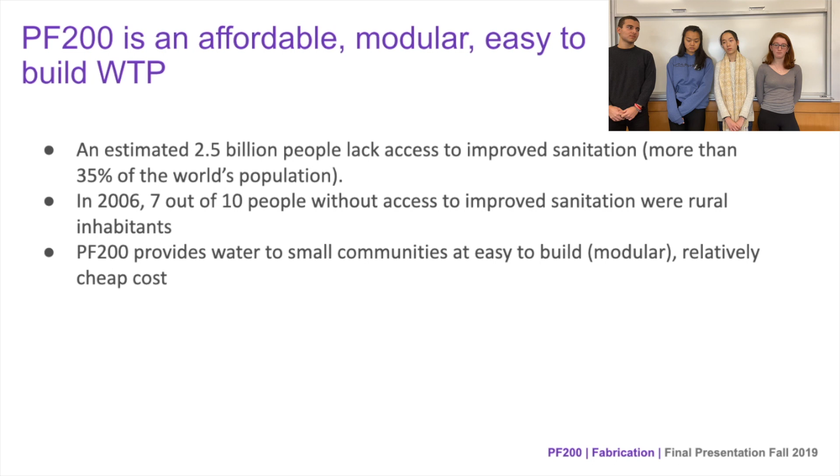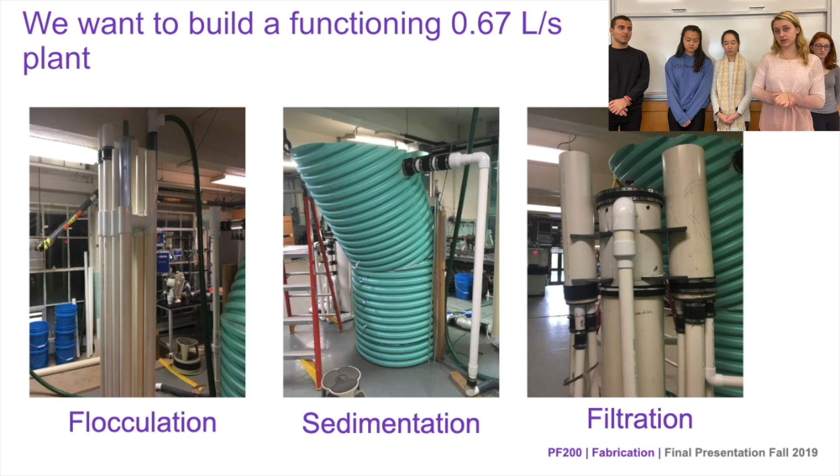With the success of a PF200, a small but impactful dent could be made in helping spread access to clean water. So the work of our team this semester has been mostly finding the problems with the past iteration of this plant, and there are currently problems with the flocculation system, the sedimentation tank, and the filter. And we will talk more about what we are doing to address these problems shortly.

So the past designs of the flocculator involved using a long pipe that was contracted at certain points to achieve the necessary head loss for flocculation. But then in spring 2017, a possible new design was suggested where they would use PVC semicircles that would be threaded through a rod, and that would act like a traditional baffle.

However, there were still some issues with the flocculator. Many of them involved the high cost of PVC fittings and the short residence times. Because of the short residence times, plant operators would have less time to react to certain events in the flocculator, such as dirty water reaching the sed tank.

And based on these criteria, the PF300, which is now known as PF200, was in need of some improvement in the flexibility of the design. In particular, they would need to design a more efficient design for portable plants of different sizes.

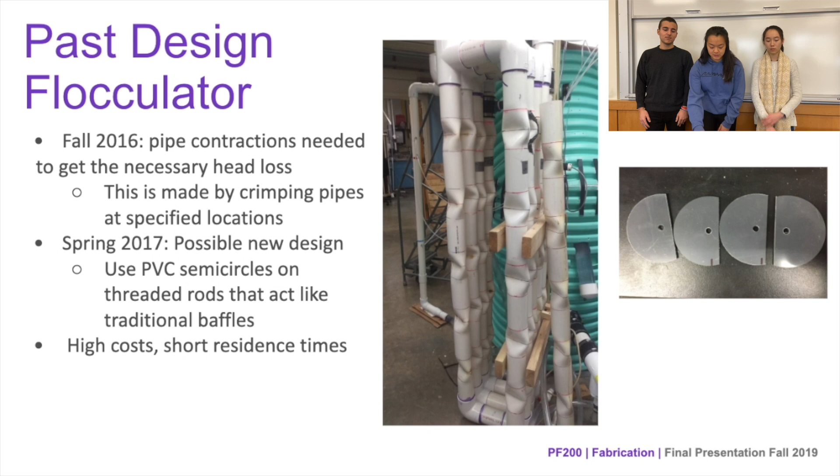As of now, we're mainly focusing on redesigning the filter. So the majority of the redesign in the flocculator is designated for future work. However, we know there are still several constraints that we have to take into consideration. Primarily, one of them is that it has to fit a large tube similar to the conventional flocculator with more traditional baffles. And we took a design from the CEE 4520 project of the flocculatorita. And with this design, we need to figure out how to keep the baffles in place.

We're considering using threaded metal rods and stringing them through each baffle, or using some sort of system with slots. However, this will also depend on what material we are choosing for the baffles. And beyond the baffles, we will still have to decide what height the flocculator is to get the desired head loss and the number of collisions that are needed for flocculation to occur.

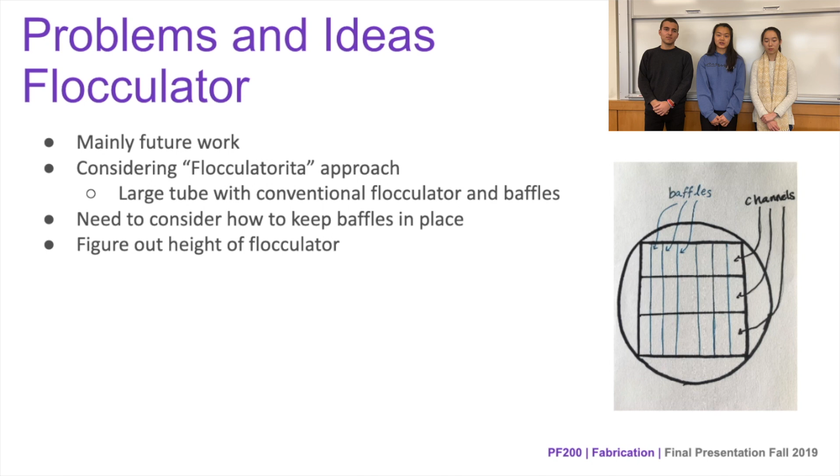So the previous design of the sedimentation tank was a large pipe that was cut and then welded back together at an angle to support the sedimentation plates that allow the floc to settle on. And the sedimentation plates themselves were literally plates of metal slanted at an angle. And some previous versions in Honduras were actually plastic roofing tiles for this function. And there was a single jet reverser at the bottom of the tank to prevent floc from accumulating at the bottom. And finally, there was a floc hopper to remove floc.

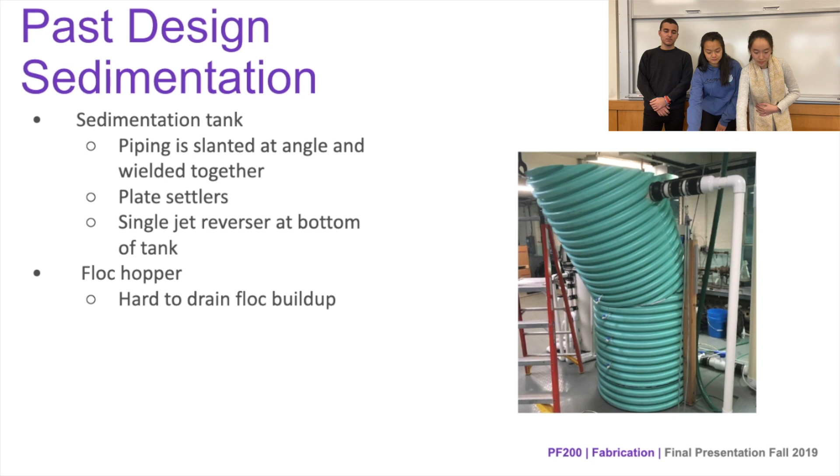And so there were several problems we found with the old design. The slanted top of the tank was rather hard to fabricate, which kind of defeats the purpose of the PF200, as it should be easily shipped and fabricated on site by local workers. The floc hopper was also discovered to be too small, which led to floc buildup in the tank. And the bottom geometry of the tank was also rather hard to manufacture, as jet reversers were designed to be implemented in rectangular concrete plants rather than the circular tubing that the PF200 sedimentation tank was in.

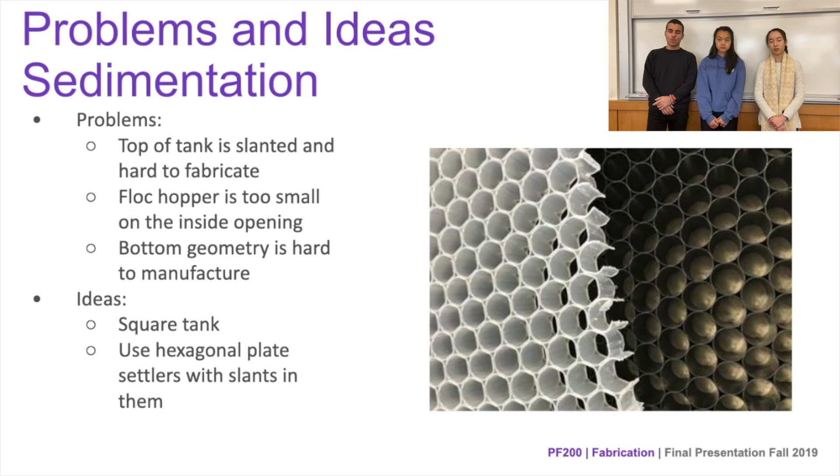Some ideas we have to fix this is changing the geometry. So we're thinking of changing the circular pipe into a square tank, which would immediately solve fabrication problems, as now we can fit a square jet reverser at the bottom. And we're also considering using hexagonal plate settlers to limit the need to physically slant the tank itself.

So the PF300 filter has 4 main components: the entrance tank, the filtration system, the exit tank, and the backwash line. The distribution of flows can be seen on the image that you have on the right of your screen. And there were two main problems related to the design of the last summer.

The first of them was that significant losses of sand were observed during the operation of the filtration system, and this happened in three main ways. The first of them was through the exit pipes, which was not supposed to happen because they have slits whose size is supposed to be smaller than the sand particles. Another way was through the entrance pipes, which was rather possible because their holes were larger, and also through the backwash line, which was also possible if the velocity of the upflow was too high.

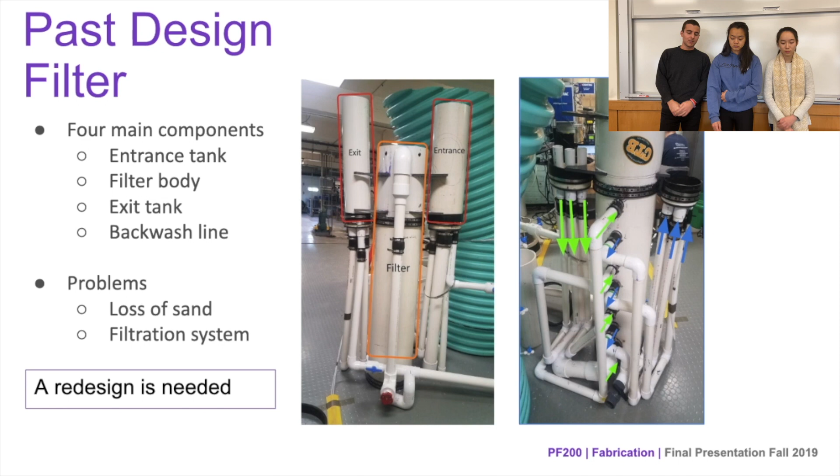And also, the second and probably more important problem was that the filtration system never actually worked on the summer model. So a redesign has to be performed. The aim of our team is to introduce gravity exclusion zones in the outlets, and the plan is to build a new full filter and test all the possible designs.

The filter tank should be made of transparent PVC so that we can inspect the forward filtration and backwash processes and check that sand does not escape into the exit tank. The tank will have a rectangular shape, which will make fabrication easier, and also will reduce the costs.

And the STARS exit outlet pipe has to be redesigned so that sand doesn't enter the exit tank. And the current proposal is to build pieces for the flow channels that are similar to the CAD design that you can observe, for the gravity exclusion zones. The team has worked on the new filter design considering the fastest flow conditions, which happen when the backwash process has just ended and the filtration process is starting again.

An optimization process was carried out to determine the dimensions of the flow channels, and the team encountered situations in which we had too many variables and too few constraints. So we had to have several meetings and take several decisions to make those variables fixed and introduce new constraints so that a final design was obtained. A final design has been obtained, and we have already 3D printed 3 models. And the next steps are finding a way to fix those pieces to the filter tank and also to test the overall system.

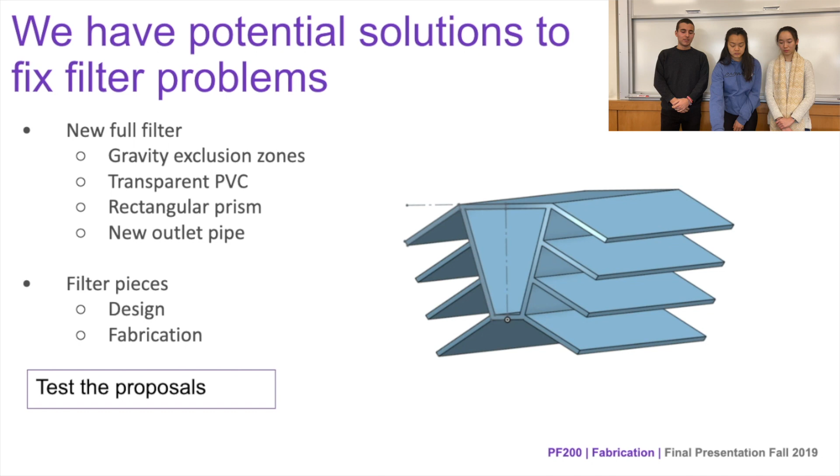So the fabrication part of this fabrication team so far has been the 3D printed flow channels that we've made. The different iterations are mostly based on the different dimensions of the filter tank that we decided to go with, the different hole spacings that we've calculated, and the thickness of the material.

And we've stress tested these, and they seem to be ready to be put into an actual filter and used, but we haven't yet tested them in an actual forward filtration or backwash setting. So we're not exactly sure if they work, but the calculations that we will show you in the appendix have informed these decisions.

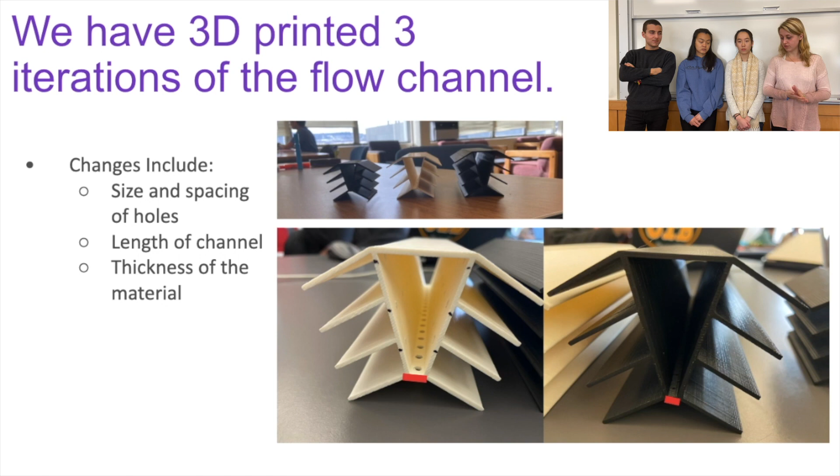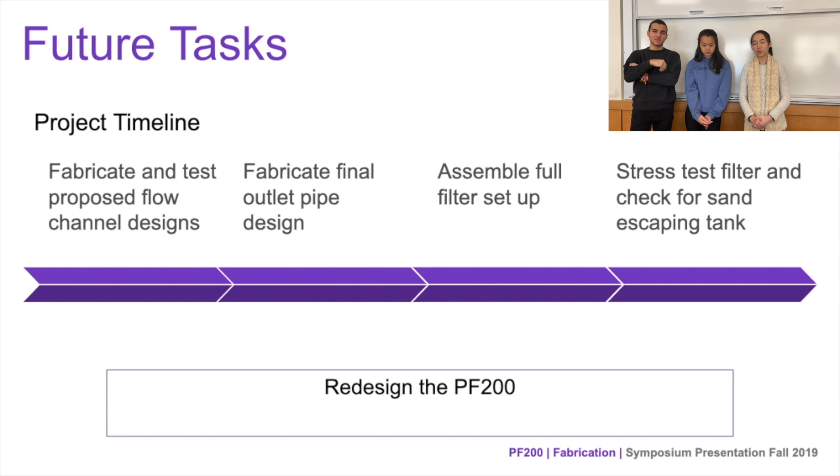So as you can see, there are many parts that need to be redesigned for the PF200. We have chosen to start with the new filter outlet pipe, and then we'll move on to the flocculator and the sedimenter. For our future plans, we plan to start to fabricate and then test the proposed flow channel design, as Whitney was saying. And from there, we will begin to fabricate our final design and begin assembling the full filter setup. And then finally, we will be able to stress test the filter and determine if this is the best design.

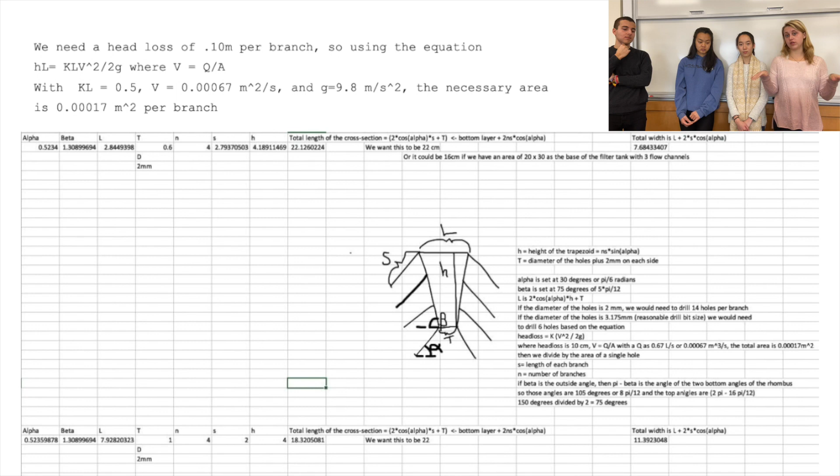So our calculations have been mostly the backbone of all of the decisions that we've made this semester, with some constraints based on ease of fabrication. The most recent calculation was to find out the total area of holes needed per branch based on head loss calculations, and also the number of branches and the angle that those branches should be at, which was decided based on the work of Stars Fine last year and some Excel solver methods about how to maximize the surface area of the sand-water interface.